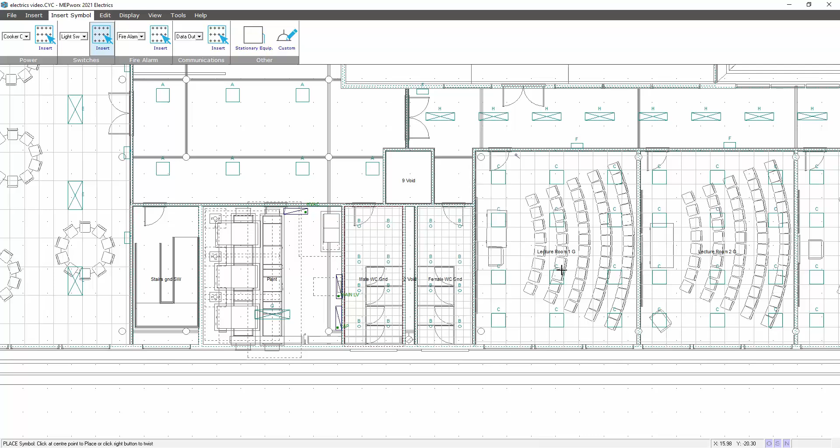These give me attributes like part number, manufacturer, unit cost, and these will appear in the schedules and bills of quantities. I can suppress this message by choosing don't show this again. There's my next light switch on the end of my mouse, so I can place that one. Now I'll press escape.

If I zoom in a bit, I'll insert another light switch. You can see them - right button click to rotate, and I'll do another right button click to rotate that one. If I press escape, then I could put a movement sensor in.

Let's say we had some movement sensors in - there's a little vestibule, so I can add those in. Motion detector, place one there, place one there. Pressing escape to add different symbols.

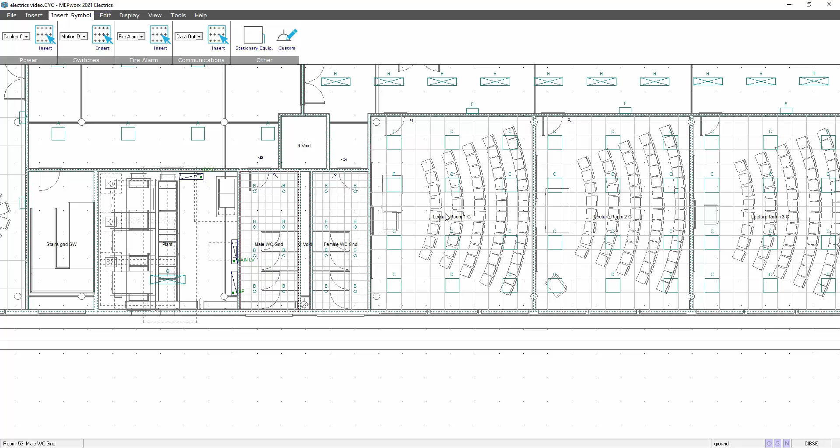If I want to put some sockets in, while I'm on this part of the layout, I can put some sockets in - insert on the symbol library, going into insert symbol, into power, selecting the type of socket I want, a 2-gang switch socket, pressing the insert button. Again you get your symbol, right button click to rotate it, and place it on the layout.

When placing things like sockets or any other items, you can reveal any other services. So if I went to display options, prior to putting those sockets in, I could go to show services and show my piping to see whether there's any radiators in front of my socket circuits. You can see there the radiators appear - doesn't appear to be a problem with those radiators.

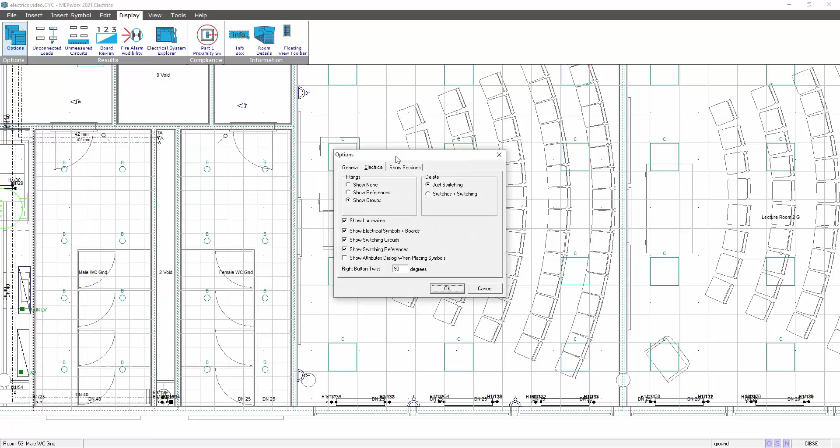I could go back to display options and switch those off. So sometimes it's worth having the other services shown when you place items. There's no hard and fast rules about placement of items - you can work on a part of a drawing and put as many different symbols as you like down, or you can just put each of one type of symbol, finish with that command, and then revisit and add all your symbols of another type.

The next thing I'm going to do is show how I would add in a lighting circuit to the lighting and power board. Here you can see we've got these spotlights, light switch, movement sensor, and our lighting and power board. So in order to add circuits, we need to select the board first of all - the board of interest. If you can't see the board on the layout, you'll get a little message in the corner saying use right button click menu.

If you do the right button on your mouse, that will give you a tear off sheet in the middle of the screen with a list of your boards. Select the board, and that will then present you, when you select insert switching, with a board diagram. So there's your representation of the board, L1, L2, L3, and your ways. You select your way from the list by merely clicking in the list. The phasing arrangement is determined by this little dial in the corner here.

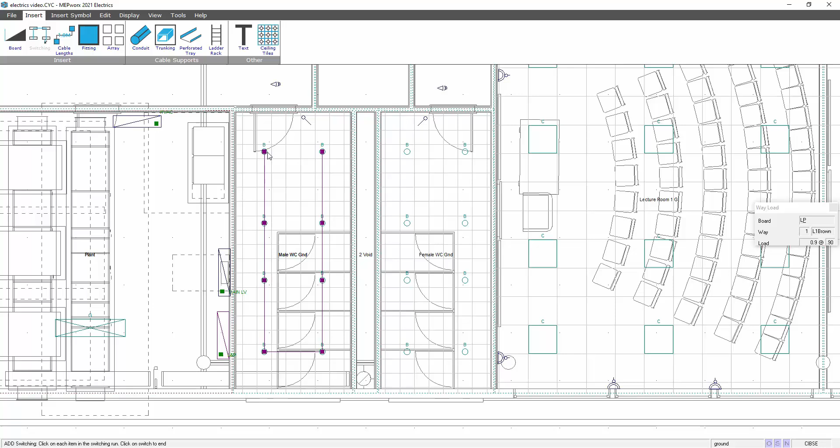So if it's my intention to add these lights to L1 way number 1, going up to the top, I select way number 1, select L1 brown, select OK, and then I click once on each of my light fittings with one click. This connects the fittings together, and this will look at the circuit wattages from the lighting database that was used in the lighting program. Click once on the switch, and that gives me my current rating, 0.9 amps, on that way number 1 L1 circuit.

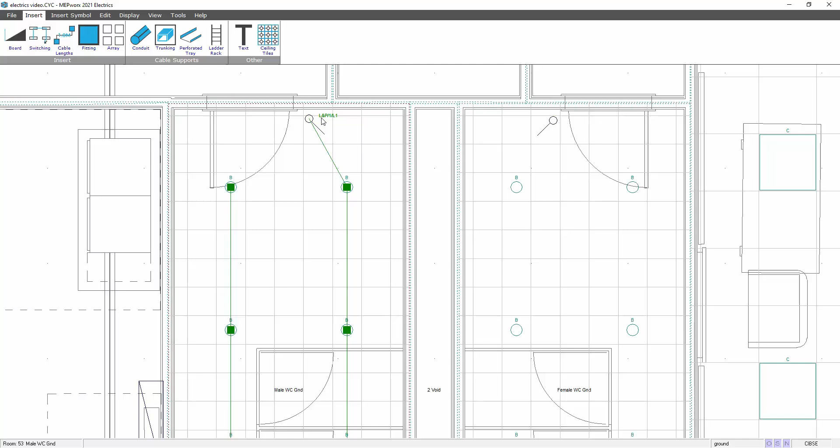I've now connected that in, and you can see here you're getting your circuit reference, lighting and power, that's the board reference, way number 1 L1.

Now to put my cable length in, again I could go around the layout and put all my light fittings in if I wanted to, and then decide on the cable lengths. While I'm here on this section of the layout, it just makes good sense to apply my circuits while I can see them. So what I'm going to do, to assist me in the arrangement of the circuits, is also add in my containment.

Now you might have this containment as part of a DXF file. So you can run your containment by clicking, and then I can double click on the last bit of containment. You can see here the orthogonal's out a bit and it's not very tidy, so I can click on it once, it goes purple, press delete on the keyboard.

I then set my orthogonal. In the bottom right corner the orthogonal wasn't set, so I can set it, and then what I can do is go and repeat that process to make a better job of it, keeping the orthogonal.

If I wanted to continue on with conduit to somewhere, I would just select conduit, click on the end of the run, and then decide to run my conduit to a position somewhere. So if later on I'm going to put a split system in that office, I'll just run a bit of conduit down to there. And when I put my split system in as a load, I can add that in.

So now I can connect my circuit to my light switch in terms of the cable length. Now before we do this, there's a status report you can apply.

On the display menu, you've got unconnected loads and unmeasured circuits. So we've got these lighting circuits connected up and they're in green. If I select unconnected loads, you can see all of these lights are now purple. This means when you revisit the layout, if you're not sure on the status of the system, you can see the purple colour representing circuits that are unconnected. With light fittings, it's fairly obvious because you've got the cable between them.

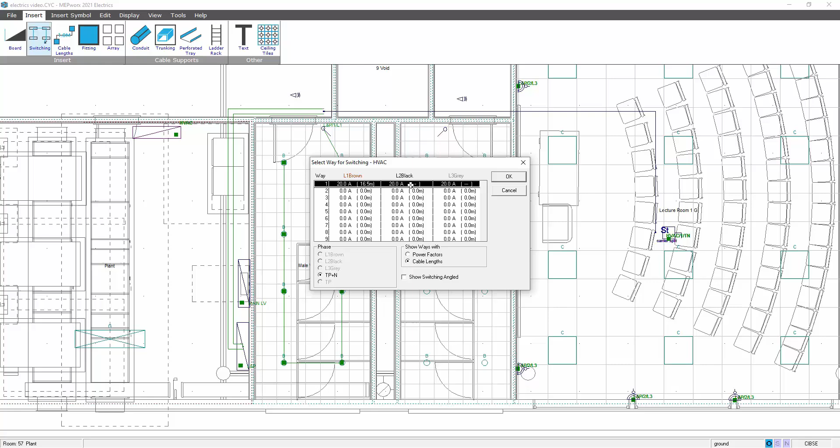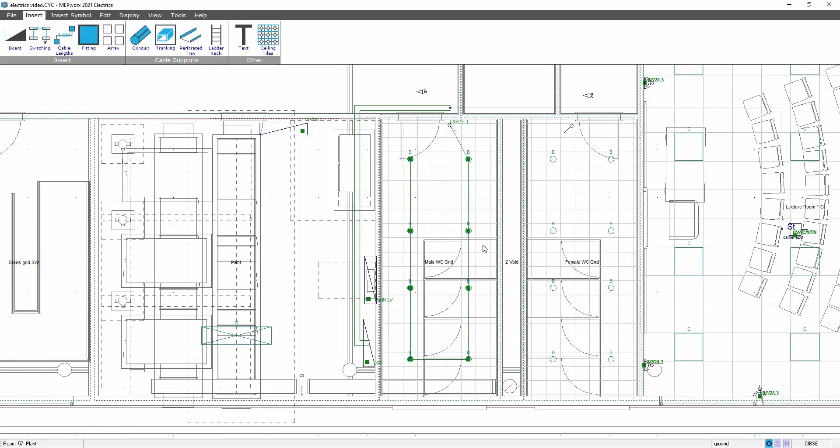Now what we can also do is reveal other services. So if we've done some pumps, pipe layouts, etc. in the piping program, or fan coil units even, in display options on show services, I can show the piping, and this will reveal all of my circuit loads.

So if I've got some pumps on the layout, for example, I could insert some circuits on items I've already got placed. So if I want to allocate one of these pumps to a specific circuit, all I need to do is insert switching. I'll go to my HVAC board again, insert switching, and I want that pump number 2 on L2 black. Click on that, double click on the pump to reveal the load.

So that load was entered when the pumps were entered in the piping program. Select OK, and that then gives you a load on that particular circuit of 10 amps. And again, we would run the cable in exactly the same way.